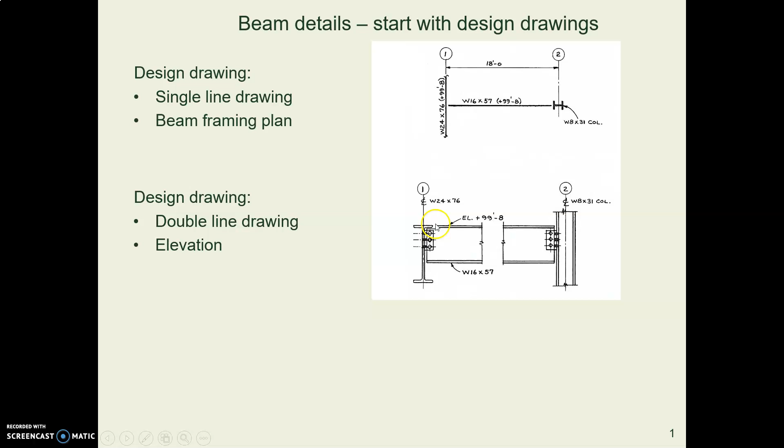Over here where the beam connects to the girder, that top surface needs to be flush because we're going to put steel decking and floors up there. So to make that flush, you cope or notch that beam.

Here is a 3D view of that kind of connection. Here's that same elevation view again, and here's a 3D view of a beam connecting to a column, and then on the left a 3D view of a beam connecting to a girder, and that beam is coped or notched out so it will be flush.

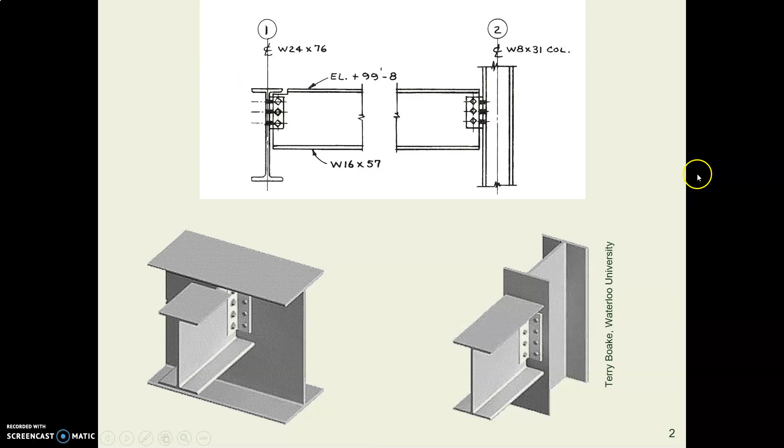All right. What you need to know about detailing steel is that everything is standardized. A structural steel building contains thousands of pieces of steel. And in order to be economical at all, we've got to be able to produce these in mass quantity fast. So the steel fabrication company will have certain standard sizes in stock. They'll have certain sizes of framing angle in stock, and they will use fixtures to do all the coping and drilling. I'll show you that next.

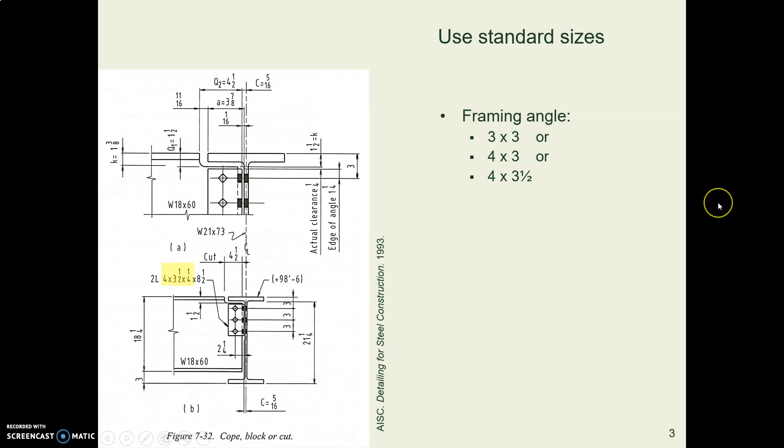So the framing angles, these are the three standard sizes that you might encounter for one of these connections. And then you can cut that framing angle at several different lengths. In the steel fabricator's shop, there are fixtures, big metal frames that hold the beams so that they can come in and drill holes real fast over and over again in the same spot. So in order to make that fixturing possible, we always locate the holes the same way every time. We always do three things.

One, the first hole of a framed connection is always 3 inches down from the top of the beam or girder. Two, the spacing between holes: they are always 3 inches apart on center. And three, it is always 1.25 inches from a hole at the end of an angle to the end of the angle iron on each end. So look at the framing angle in the bottom view here. It's 1.25 inches from the top hole to the end of the angle, and it's 1.25 inches from the bottom hole to the bottom end of the angle.

And then the holes are always standardized. We always use 3/4 inch bolts to fasten these unless there's some special situation. And the hole is always 1/16 of an inch bigger than the bolt. So that means these holes are always 13/16 diameter. And in the steel fabrication world, unless you're using some special size, you don't call out those sizes. Everybody knows that's what you're drilling or punching.

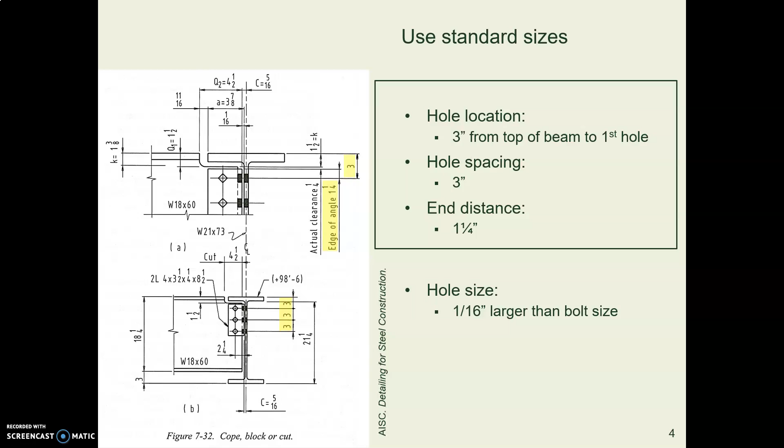Okay, so these framing angles are always 1.25 inches from each end to the first bolt hole, and then the bolt holes are always 3 inches apart. So what that means is that there are only a few standard lengths that you might cut this angle, depending on how many bolt holes you had in there. If you had only 2 bolt holes, you would have a short angle, 5.5 inches long. If you had 4 bolt holes, you would wind up with a framing angle that was 11.5 inches long. If you had 5 bolt holes, it would be 14.5 inches long, and so forth. That's because it's always 1.25 inches to each end of the angle, and then 3-inch spacing from hole to hole. That's how you wind up with these lengths.

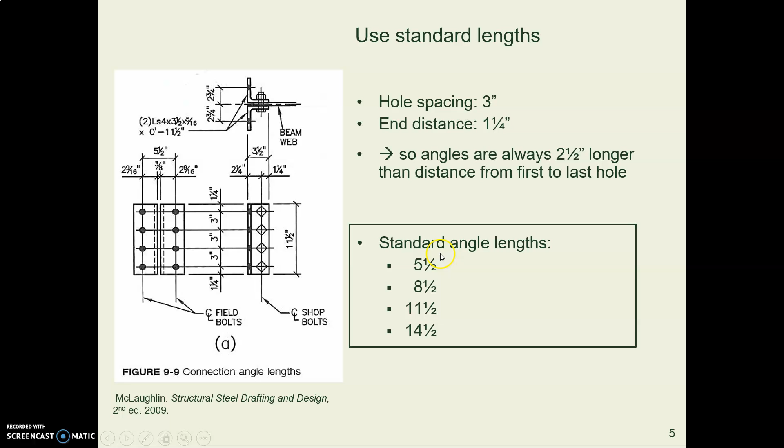Then the gauge, which the AISC Steel Detailing Manual will tell you about, the gauge is the spacing from a row of holes to the other row of holes. And we'll see this again when we look at our detailing drawing in the next video.

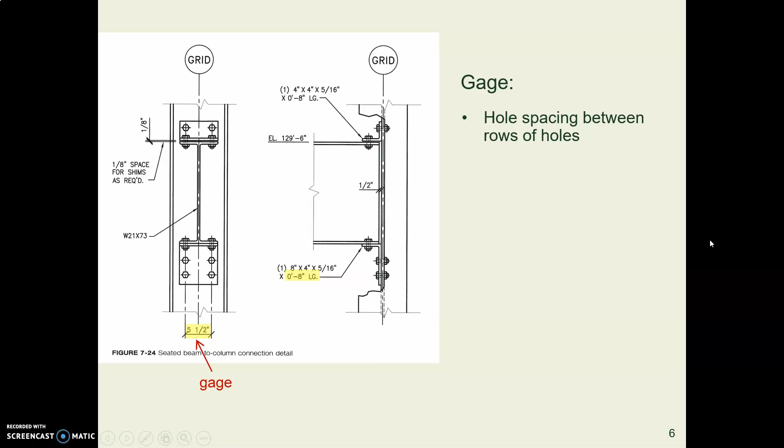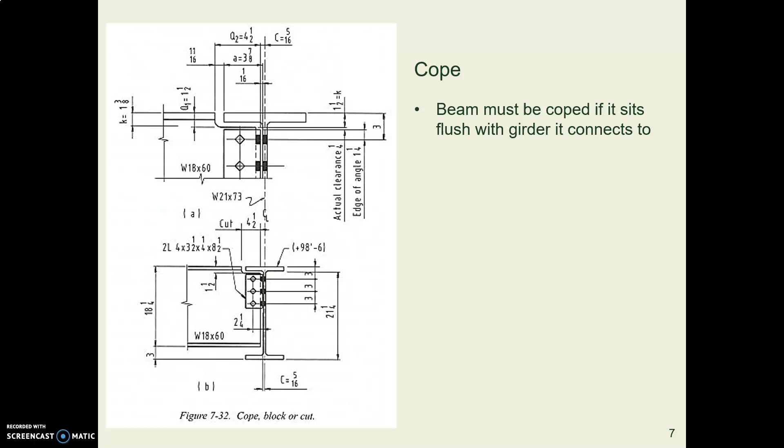The cope is this notch that we cut out. We've referred to this a couple of times already. And AISC gives us standard ways to figure out the sizes of the copes. Gets a little bit hairy, multiplying this times this. Don't worry about that right now.

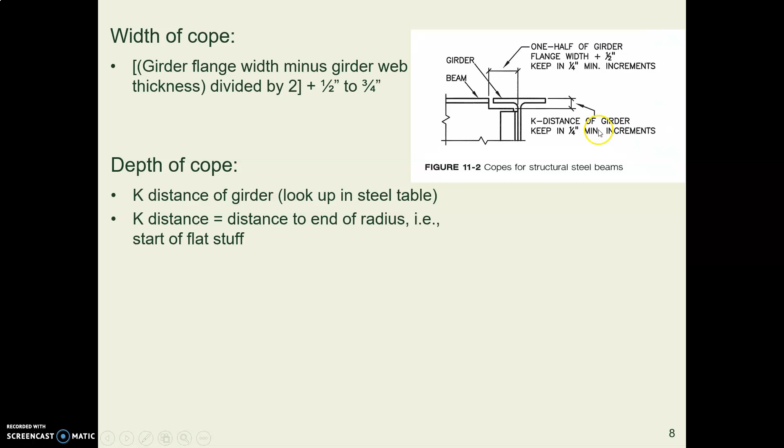One of the things AISC says is you look at the girder that the beam is being connected to, and in your steel book, it will give you a distance, they call it the K distance, that is the distance down to where the straight stuff starts. So in the underneath of the flange here in the beam, there's a radius, it's curvy, and at some point it stops being curvy and it starts being flat and straight. That's the K distance, and so we make our cope that depth, more or less. We round it off to 1/4 inch increments, but more or less the K distance.

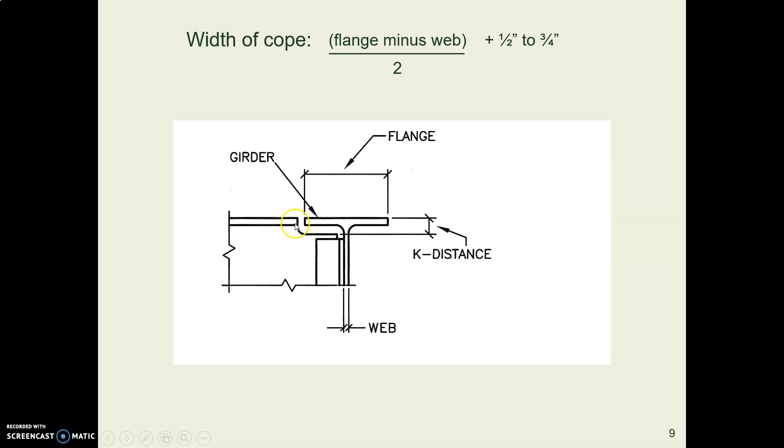And then the width of the cope needs to be wider than the flange sticks out, so we go half of the flange width, and then we add an extra 1/2 inch or so of space just to allow for mill tolerance and erection tolerance. You need a lot of wiggle room for the people out in the field who are trying to get these beams swung into place with cranes. So you'll notice in all these drawings, you'll see a lot of open space to make it easier.